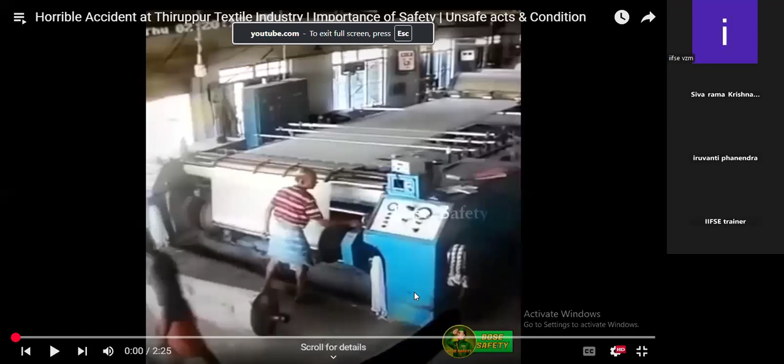This incident happened in Thiruppur. Is it visible? Can anybody respond, please? Yes sir, yes sir. Okay, the audio will not be there, just please see the video clip itself.

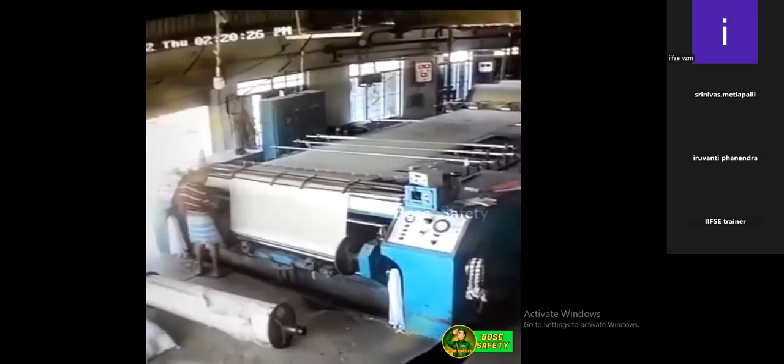It has happened in 2022. I think the cloth is getting rolled.

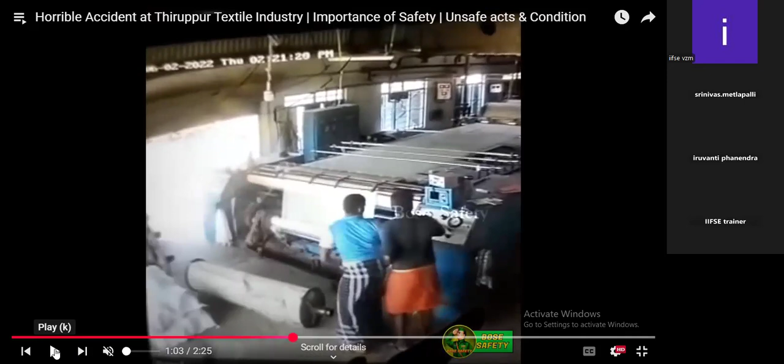See, because of loose clothing, this incident happened. If he had used any proper pant, would this incident have happened?

But sir, this type of dressing is not allowed in industry, na? It's not allowed in industry, but there are some places where people are still following this.

See, it is not very old, it happened in 2022, just 2 years back. There are industries still unorganized due to their culture, and still people are following the same practices.

We said loose clothing is not allowed, but we have not given any specific definition of what is meant by loose clothing.

Definitely, it will fall under loose clothing. Even if I use a shirt my size is small, but I'm using XL, is it loose clothing?

Yes sir, when I use extra size of pants, is it loose clothing? For example, the person who met with the accident here, his size is 28, but I have given him a 36 or 42 size pant. Is that loose clothing?

Maybe, sir, maybe sometimes. We can't say yes, we can't say no as well, because it's a hypothetical situation, where in the country the industries are not organized well, and they are still following such kind of practices.

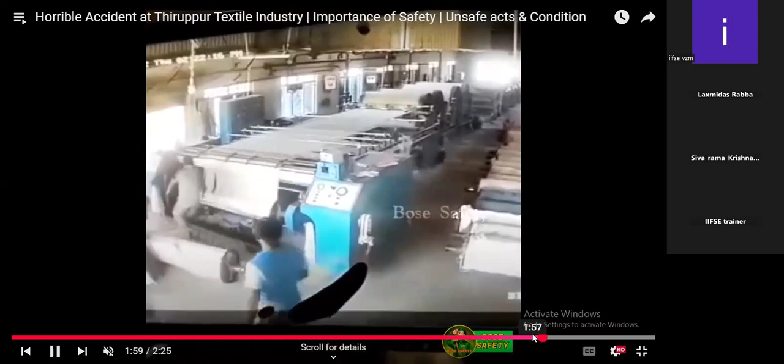At least they know where to stop the machine. I don't want to take it further, but I think he's still alive, he's asking for some help.

Okay, I'll take you to another video. This happened in China in 2023, also the same kind of rolling machine.

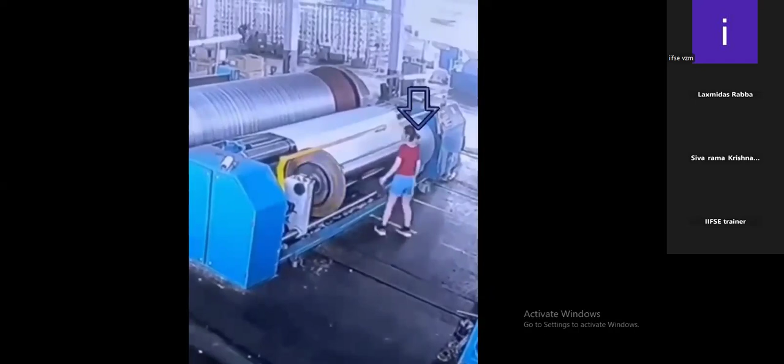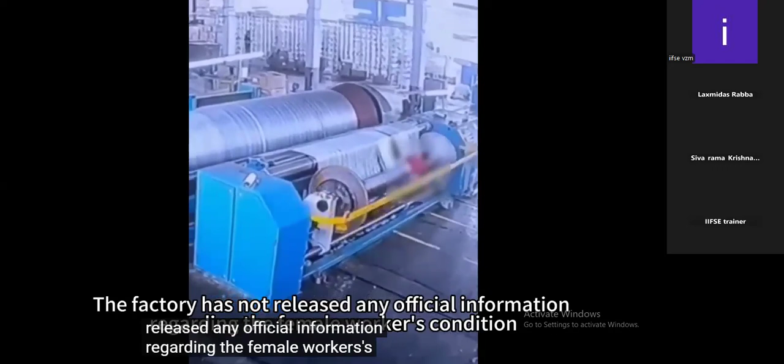See, here what happened? What happened in this video?

Is there any loose clothing issue? Was there any guard, sir? There is no guard.

Sorry? Tangential force might be... yeah, something has got stuck by her hand and it's been pulled inside. Maybe there was a pulley, or some kind of other device or part of an equipment, while she was doing that inspection.

Maybe it is the nature of the process, so they have to inspect or take out any extra pieces coming out of the cloth. Even in the first video, he had taken some pieces of cloth on either side of the machine. So we should be very cautious about such kind of activities.

Especially, I have seen this in CNC machines as well. Nowadays CNCs are coming with inbuilt safety features, so somehow these kinds of incidents are not reported nowadays.

Okay, let us come back to our slides.

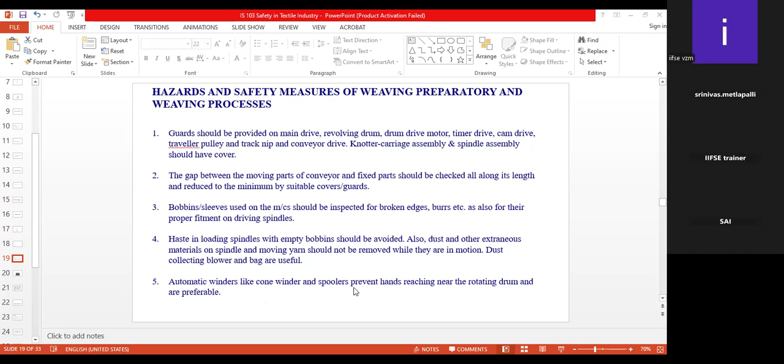An automatic winder, like a cone winder or spooler, prevents the hands from reaching near the rotating drum, and is preferable. So we have to have automatic systems in place, and make such a provision that we should not allow people to reach near the rotating drums.

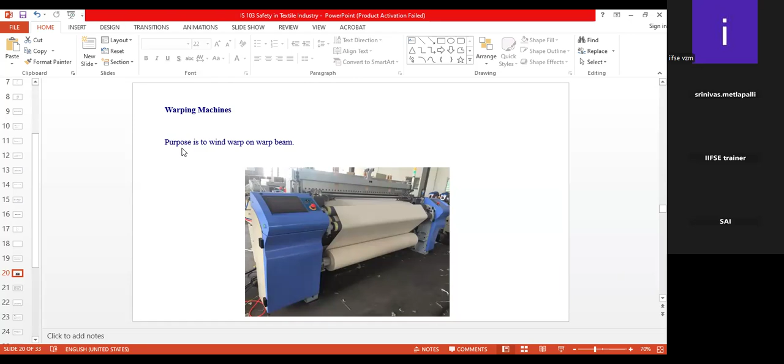If you see in these machines, the flanges of the rotating beam should be properly guarded. An aluminum flange beam without a metal flange ring is safer, and a metal flange ring may open or fly out and hit someone. So wherever we have flanges for these drums, it has to be properly guarded. Even the main drive and the gear wheels, motor pulley, clutch pulley belts, and other parts should be properly guarded, where we have connected the prime movers to this rotating drum.

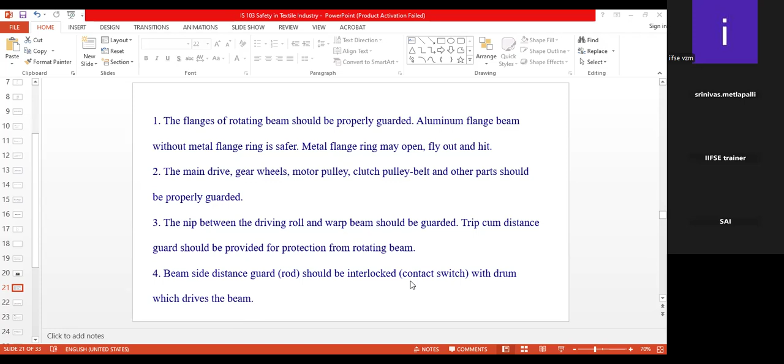Like in our Indian conveyors, we have a rope along the conveyor. If you can drag the rope anywhere along the length of the conveyor, it automatically stops the motors running that conveyor. The beam side distance rod should be interlocked with a contact switch with the drum, which drives the beam. Here also they need to have an interlock switch for the beam side distance or distance guards.

A multiple photoelectric device is more safe. The photoelectric device - whenever you interrupt the photoelectric beam, automatically the machine stops. It is like a kind of gateway, invisible in place. On one side we have the generator, on the other side we have the receiver. Any interruption happens, and it automatically stops the machine.

Wheels of mobile stands should be guarded, and the drum drive, motor pulley, beam drive chains, and beam ends, as well as section warping gears, should be guarded. These are the few safety systems we can implement to avoid accidents in the industry.

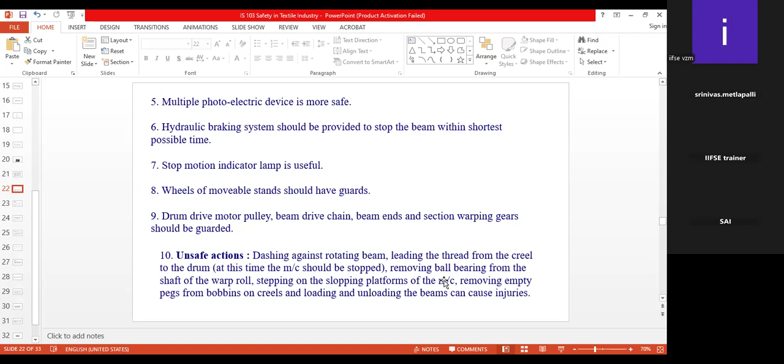Removing ball bearings from the shaft of the warp roll, and stepping on the sloping platforms of the machines, removing empty pegs from the bobbins on creels, and loading or unloading beams can cause injury. These are a few unsafe actions.

Then let's look at the hazards and safety measures with respect to processing, finishing and folding machines. Here we use multiple types of machines like shearing machines, singeing machines, washing, bleaching, kiers, ironing, and also cloth dyeing, printing, polymerising, sanforising, stentering machines, padding, finishing, and folding machines. Folding machine is nothing but folding of the cloth, which then becomes a bale cloth or cloth bale.

So here it is the in-running nips. In-running nips, as I mentioned in engineering section 2, is where we have two rotating gears moving opposite each other - that is a running nip. It is the point where two gears are running opposite or moving opposite each other, between rollers and similar parts - not only gears, sometimes rollers as well. Unless the nips are inaccessible, they should be securely guarded with nip guards along the whole length of the intake side. So if you're able to lift or increase the gap, it is fine. In case of any incident, if you're able to create a gap between these rollers, it is fine; otherwise, we have to put a complete guard.

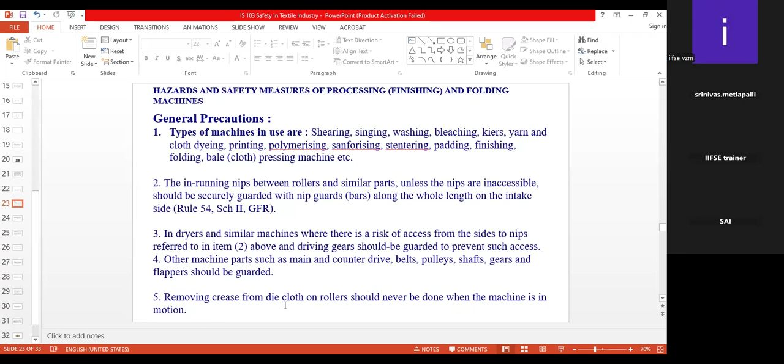Removing crease from the die cloth on rollers should never be done when the machine is in motion. Crease is nothing but waste pieces, etc.

Okay, that is about the finishing hazards. And with respect to fire and explosion, it is again a common incident.

Cotton dust is not fine enough to cause any dust explosion, but it may certainly cause fire if any spark is available. So while doing any ginning activity, where you see fine cotton dust in the atmosphere, by itself it will not create any dust explosion.

In case of any spark available, then there is a chance of cotton dust accident or fire. Explosion hazard lies with polymerizing or curing machines where flammable liquids are used, and therefore explosion reliefs are required. Fire hazard is more in blow rooms and spinning sections due to loose and flying cotton, and in the processing department due to solvent and chemicals.

Especially in the blow rooms, as I mentioned, the ginning process as an end product will create cotton bales. After that the blow rooms take it out, and there we start the spinning. From the cotton we start creating the yarn, which is nothing but thread. So those are the two areas where we have chances of fire accidents: blow rooms and spinning sections.

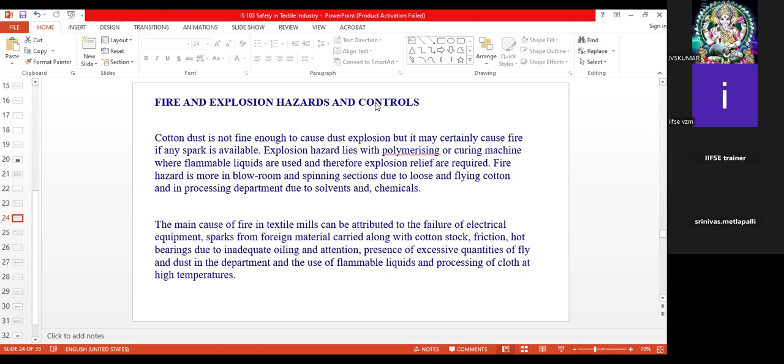Sir, regarding the previous slide, what are the safety precautions available with reference to dust or fly hazards in the textile industry? I mean from the industry point of view, I'm asking—the flying dust from the cotton bales.

One with reference to the blow room you were referring to, and another blow room related, yeah. Basically, in the blow room, they will have an exhaust system for the collection of whatever dust is coming out. Sometimes they practice it as a closed room condition where they will not allow any dust from that room. That is one practice they follow.

Only extract system, no other way of controlling, because it is in a huge process. Or they will segregate this area into a separate area, like how we do welding booth, such kind of setup. There they have extraction system for all the dust which is generated.

And what is your second question? Fly? Yeah, related to the fly and cotton dust you were referring, no? What are the measures? Flying cotton is nothing but, as I mentioned, in the ginning process the loose cotton will be pressed and made into a bundle. In the blow rooms, they will cut the bundle and throw it into the blow rooms. Again it becomes cotton. So that is the flying cotton.

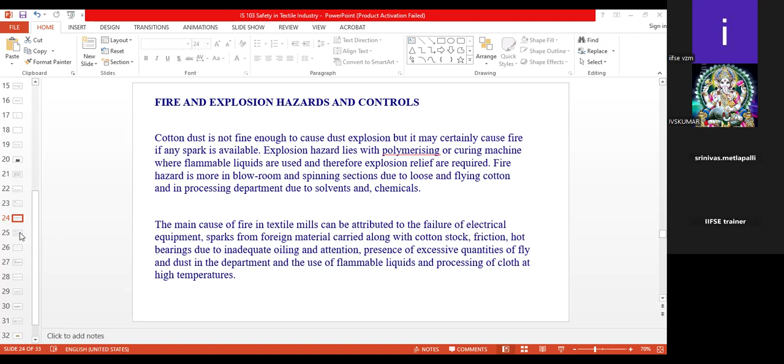In case of any short circuit or transformer failure, it should not take the fire or spark near the process. Even the boiler houses should be completely away from these processes.

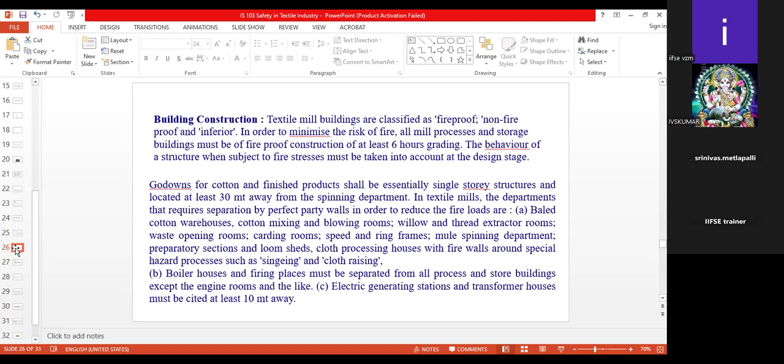Then warehouses and stores. Breakage of cotton bale hoops causes sparks and subsequent fires. Faulty electrical equipment, both for lighting and bale stackers, may cause this. Lots of baled cotton must be stacked orderly in a manner away from the godown walls.

Again, it is a common principle. We should not completely load the room. We should keep some space around the bales in case of fire, so we'll have a chance to extinguish it, prevent the spread of fire, and assist in fighting it.

Then adequate drainage of godown floors is necessary in order to prevent excessive water damage of any lower layers. So the drainage also should be properly designed.

And also all sources of ignition like mechanical sparks due to friction, electrical sparks, sparks from welding or any cutting in case of fabrication or repair works, prismatic effects from sun rays, glass windows on cotton bales. Glass windows in the sense, sometimes because of sunlight, any glass which is projecting may also ignite.

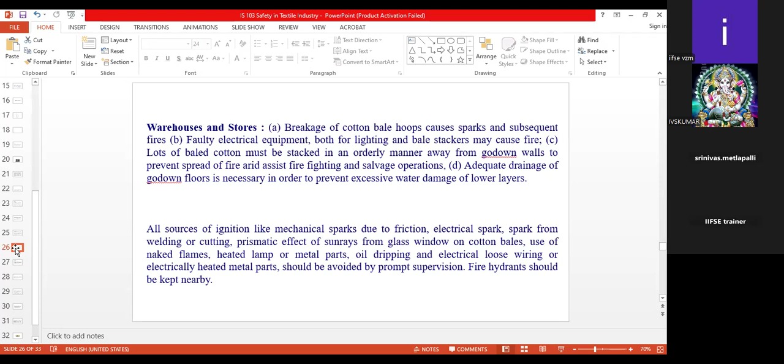Then fire extinguishers. These are the main sources, I can say our instant weapons to fight against fire. So the firefighting arrangements consist of portable appliances, water hydrants, and automatic sprinklers, which must be designed and laid in accordance with the relevant IS specifications.

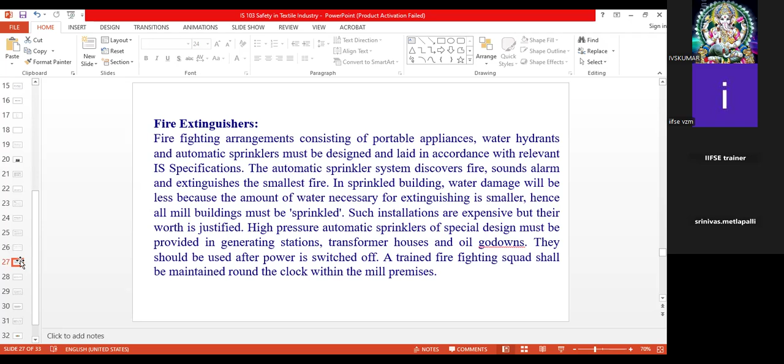Automatic sprinkler system discovers the fire, sounds an alarm, and extinguishes the smallest fires. In sprinklered buildings, the water damage will be less because the amount of water necessary for extinguishing is smaller. One second. Yes, Kumar.